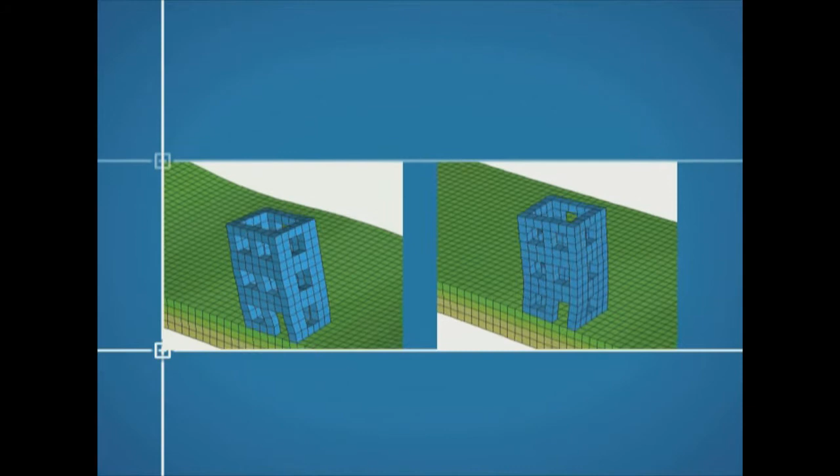Seismic waves are the energy waves caused by the sudden breaking of rock within the Earth. They convey the energy that travels through the Earth, inducing rapid cyclic movements at the base of the buildings hit by the earthquake, meaning that strong inertial forces appear.

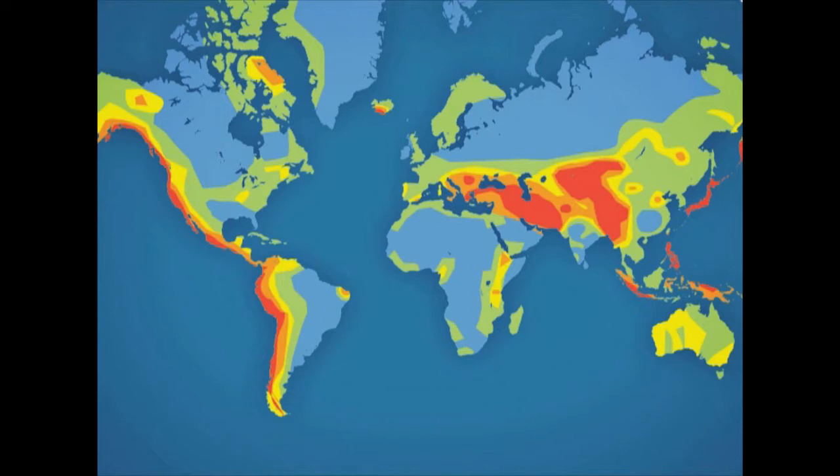Seismic hazard is the study of predicted earthquake ground motions at any point on the Earth. There are places in the world where the seismic hazard is higher due to their proximity to the lines of intersection between different plates. Seismic risk analysis takes the results of seismic hazard and evaluates the impact of the earthquake on buildings.

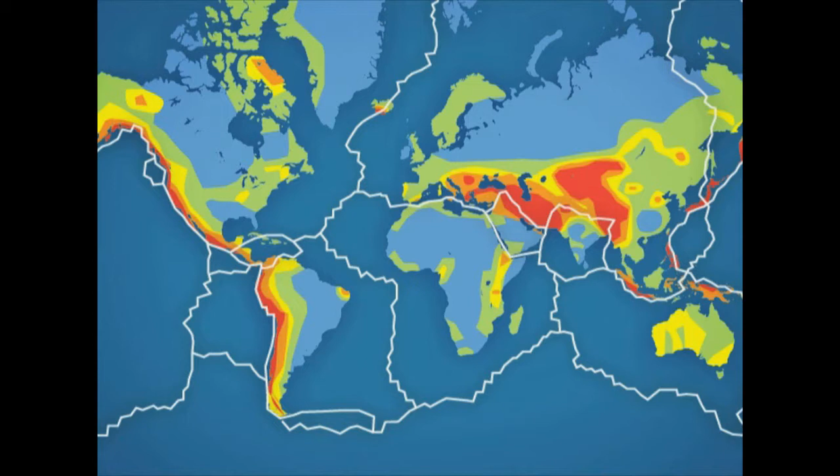Assessing the seismic risk is a key issue in the conservation of cultural heritage buildings in earthquake-prone areas. The complex structure of historical buildings makes it difficult to predict their behaviour during earthquakes. There are many examples of severely damaged or even collapsed monuments of inestimable architectural and cultural value. The 1997 collapse of the vault of the St. Francis Basilica in Assisi, Italy.

The tragedy of the 2001 Bhuj earthquake in Gujarat, India, taking its toll on the rich architectural heritage and culture of the region. The destruction of entire cities, such as Lisbon, Portugal, 250 years ago, and Reggio Calabria and Messina, Italy, 1 century ago.

In the framework of the EU-India ECCP project, Improving the Seismic Resistance of Cultural Heritage Buildings, aimed at the preservation of ancient masonry structures, with regard to the seismic risk, different investigation and analysis procedures were applied to 4 emblematic historical structures located in Portugal, in Italy, in Spain, and in India.

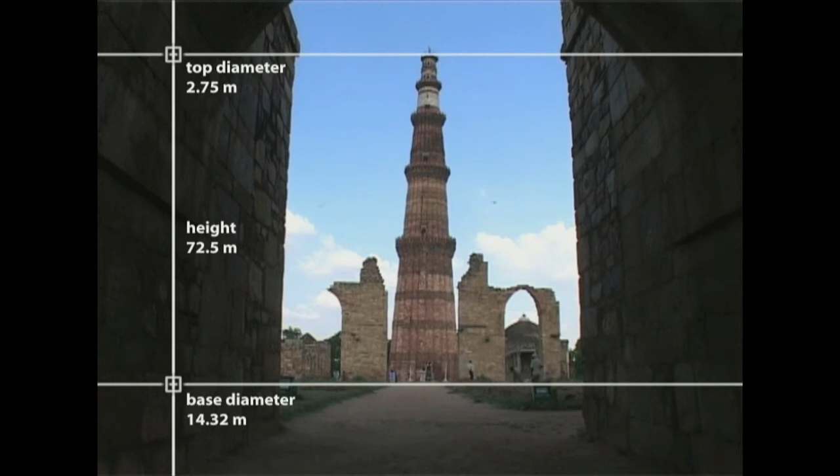The Qutub Minar is the highest stone tower in India and one of the tallest stone masonry towers in the world. Its construction began during the reign of Qutb-ud-din Aibak around 1202 and was completed by his successor. The Qutub Minar, rising to a height of 72.5 metres, is composed of an external circular polylobed shell and a cylindrical central core.

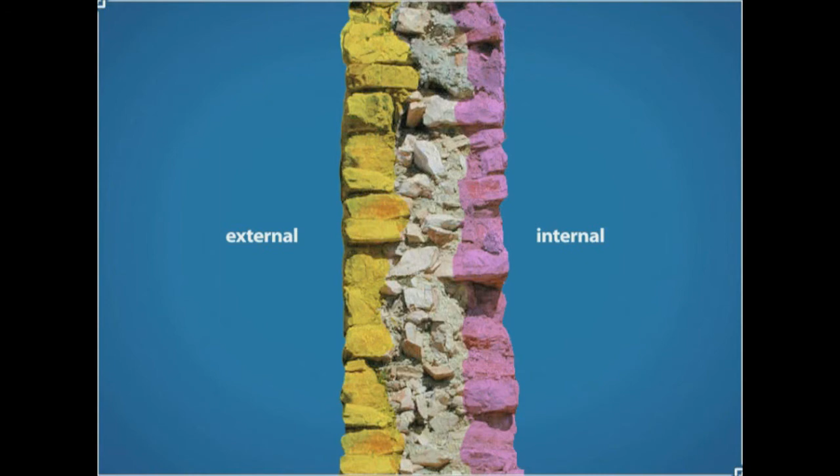The core and the external shell are connected by a helical stairway with 379 steps made of Delhi quartzite stone. The Minar outer shell is composed of a 3-leaf masonry wall. In the first 3 stories, the external veneer is made of ashlars of red and buff-coloured sandstone, while the inside is composed of Delhi quartzite ashlars. In the 2 upper stories, the external veneer is made of white marble stones and the internal of red sandstone. The infill is made up of stone masonry rubble.

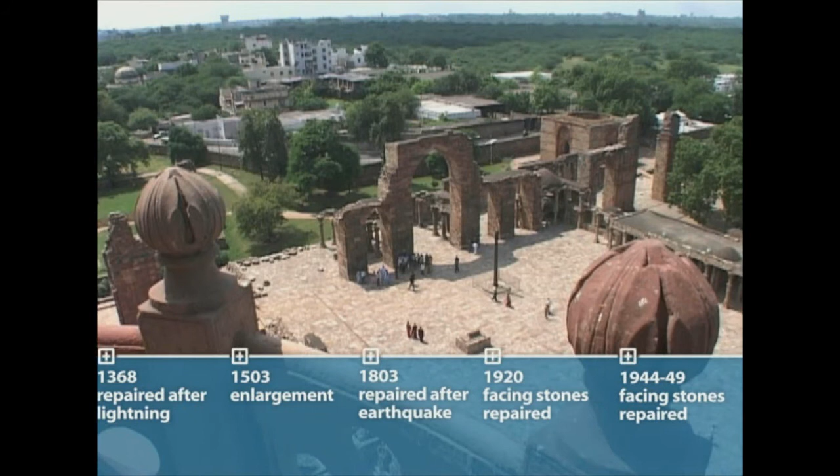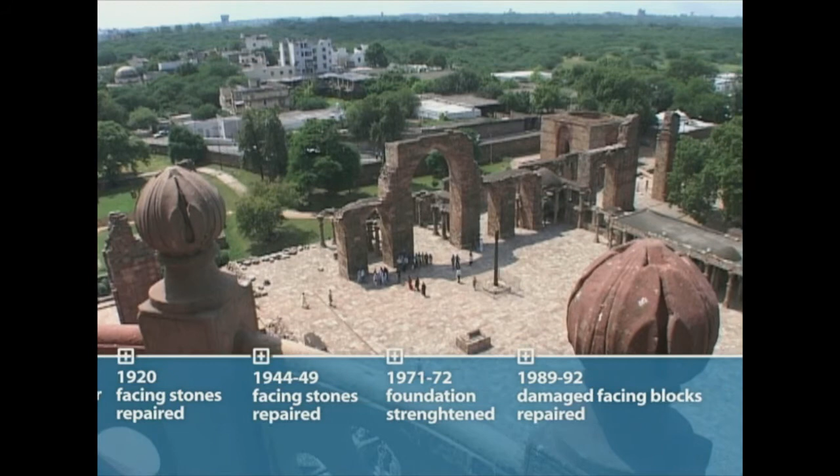Managed by the Archaeological Survey of India, the Qutub Minar has constantly been the object of restoration and maintenance work since it was built. As with all monuments in the care of the Archaeological Survey of India, there is a regular annual monitoring and maintenance plan, combined with a running programme of special restoration projects. The Qutub Minar Tower and Complex were registered in the UNESCO World Heritage Monument List in 1993, as an outstanding example of the architectural and artistic achievements of early Islamic India.

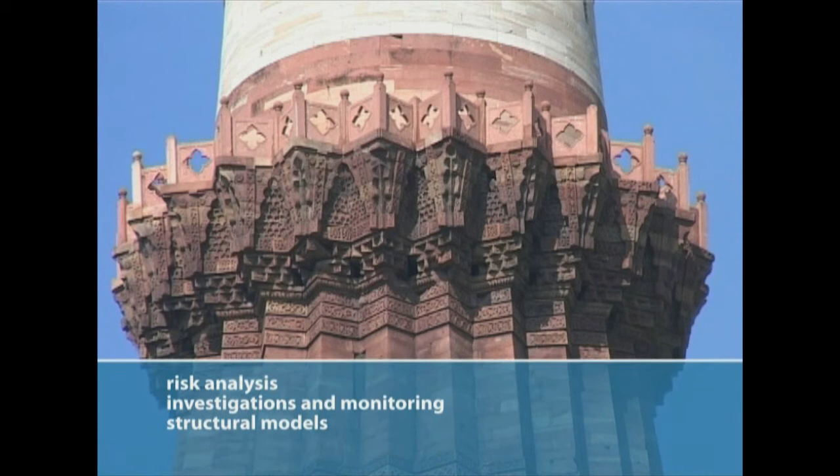The research programme includes a plan of action based on a multidisciplinary approach, entailing aspects of risk analysis, modern techniques for surveying and monitoring applied to monuments, and advanced computer simulation of reality in a virtual environment. The objective is to provide recommendations for the conservation of historical buildings in seismic regions, based on a thorough understanding of their structure, construction features, and materials. These recommendations, which also take modern materials and techniques into consideration, may help to prevent earthquake-induced damage to buildings.

The first step of the analysis for the preservation of monuments consists in the execution of a sound investigation campaign to obtain detailed knowledge of the structure and materials. With this perspective, after gathering information on the history and the present-day damage, several non-destructive tests were carried out on the Qutub Minar, intended to define the dynamic behaviour of the tower and to characterise the masonry conditions. Non-destructive investigations consisted of dynamic identification and sonic tests.

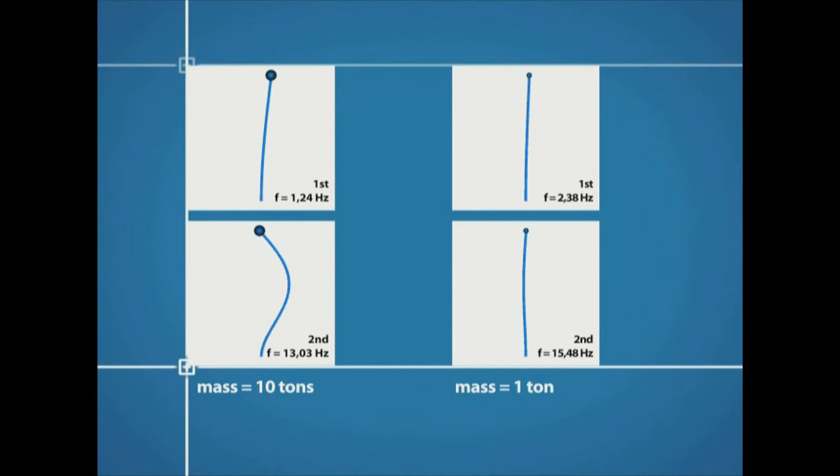Every structure possesses particular ways of vibrating, whatever the source of excitation, such as wind, traffic or seismic events, that essentially depend on its geometry, mass, stiffness and restraints. The vibration characteristics of a specific structure are a precious source of information about the physical and mechanical characteristics of the structure. Ambient vibration tests were thus performed to define the dynamic response of the Qutub Minar.

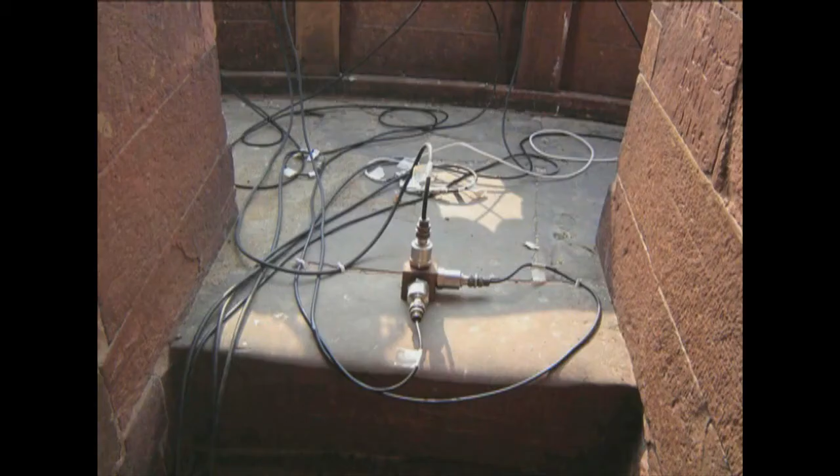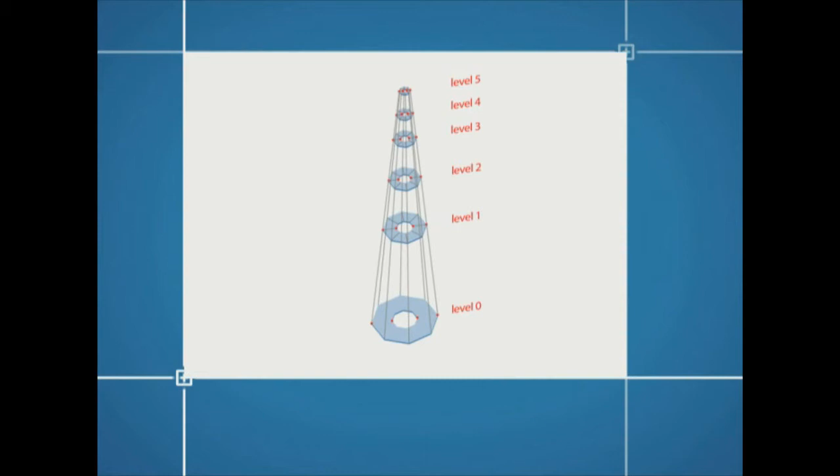Dynamic tests were carried out by using devices called accelerometers. These very sensitive transducers measure accelerations 1 million times lower than the value of gravity, defined as micro-g. They were fixed to the structure in several positions at different heights in order to evaluate the dynamic parameters of the tower and to proceed with the modal identification. As a benchmark, data acquisition systems of 3 different countries have been employed in this task.

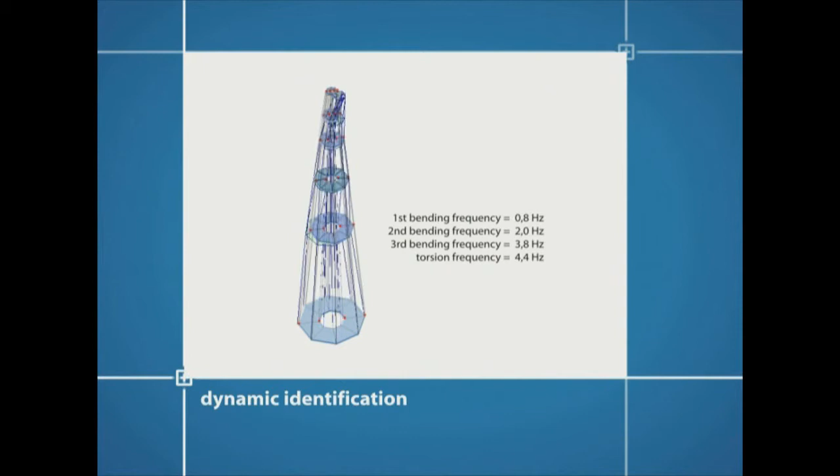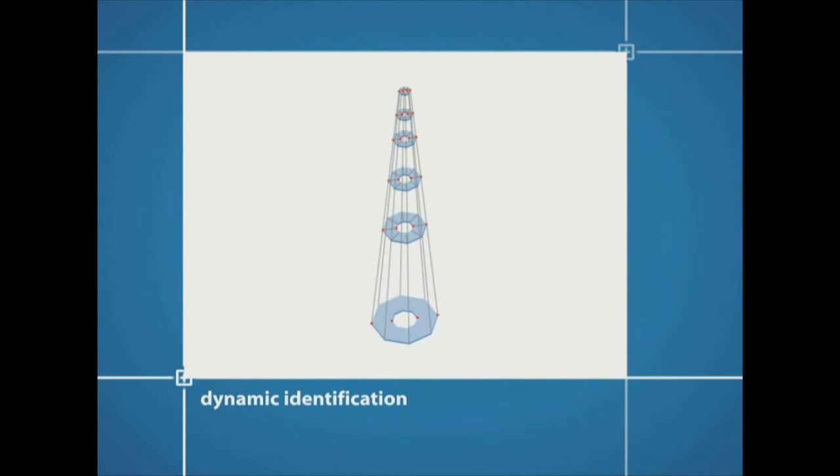Modal identification strategies allowed the definition of several natural frequencies and corresponding modes. The comparison with the results obtained by the acquisition systems of the different partners indicated an excellent match between the obtained frequencies.

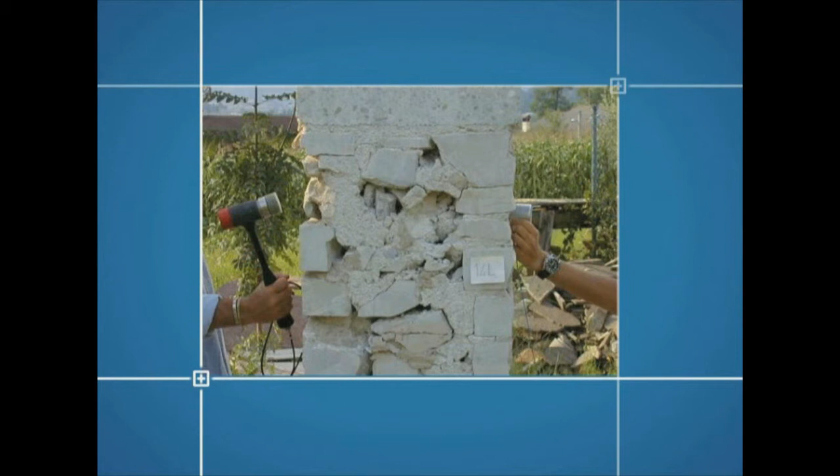Sonic tests are applied for measuring the transit time of elastic waves in masonry structures. This transit time and the calculated sonic velocity provide information about the quality and consistency of the masonry element under investigation. The velocity is influenced by the composition of the masonry, as well as by the presence of inhomogeneities, voids, and deteriorated areas. Results from sonic tests carried out on a corner at the base of the tower qualitatively defined a masonry with fair compaction characteristics.

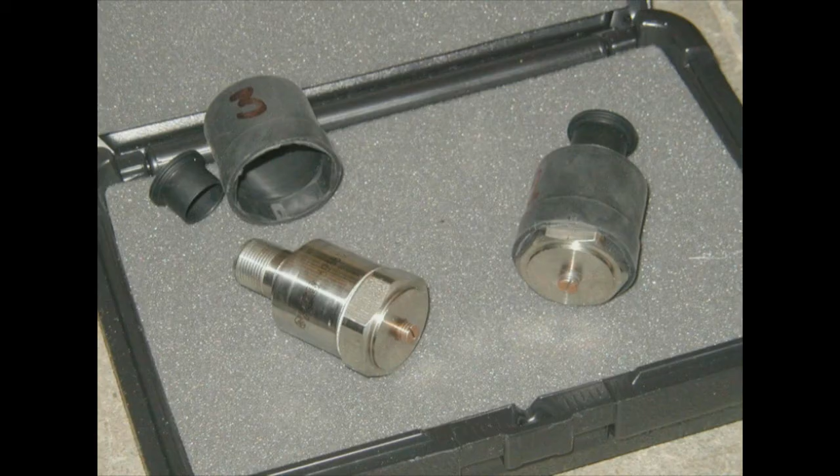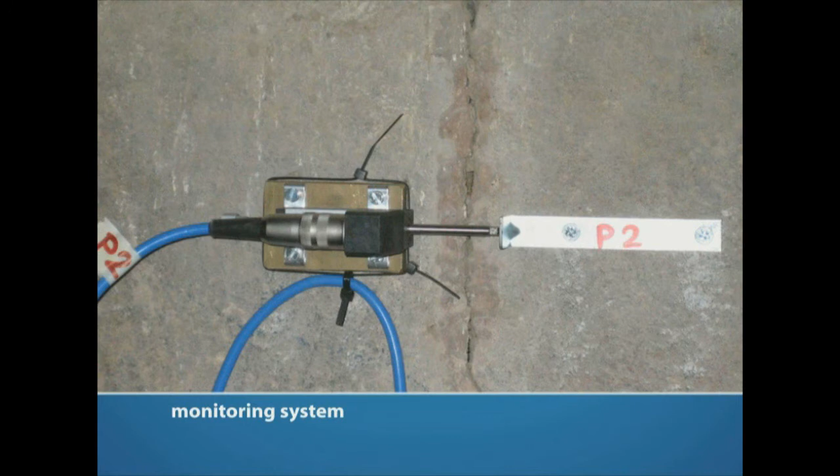Finally, a monitoring system designed specifically for the tower was installed, with the aim of characterising the response of the structure to the seismic activity. The system starts to record the data when the signal exceeds a predefined threshold based on local vibration conditions.

To properly evaluate the safety of an existing building, it is necessary to adopt suitable modelling strategies and to take into account the characteristics of the selected materials. In fact, masonry presents rather complex mechanical properties. A simple description of the material is not possible, since it does not respect common hypotheses, such as an isotropic, homogeneous and linear elastic behaviour. For this reason, suitable representation of materials must include cracking and crushing of masonry when subjected to the different loads.

Different structural models of the Qutub Minar were prepared to assess its seismic safety, using a tool that engineers denote as finite elements analysis. The models are representative of the way forces flow in the structure when subjected to different loads, for example, self-weight and seismic actions. Once calibrated, they can be used to estimate the safety of the structure.

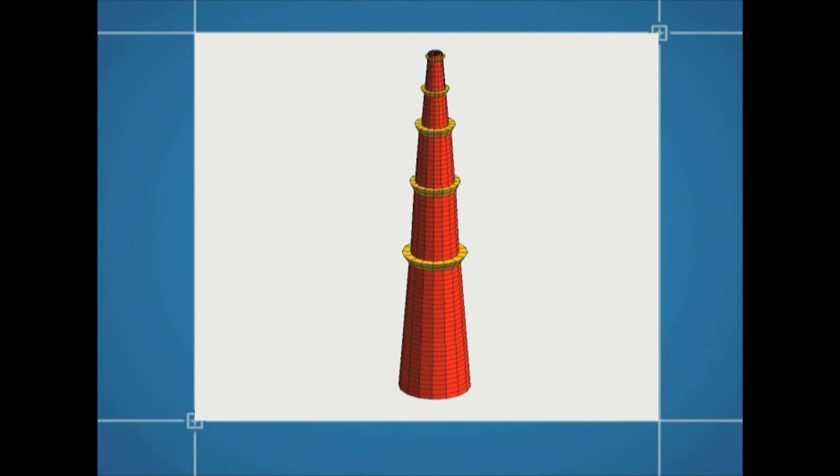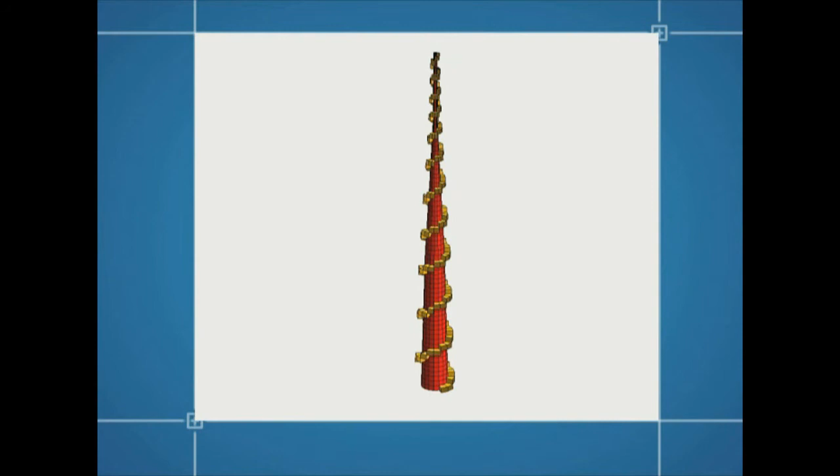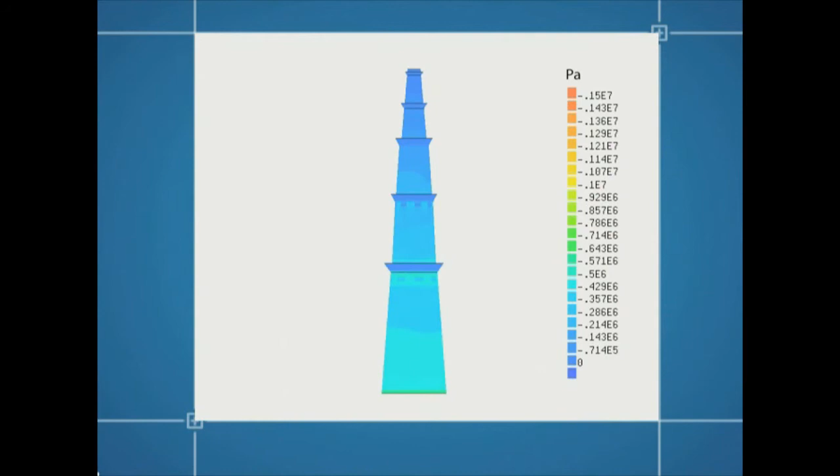The models considered to simulate the structural behaviour of the Qutub Minar take into account the different materials of the structure: the external 3-layered wall with the internal rubble masonry, the stairway, the inner core. Also, doors and openings can be taken into account. The actual weight of the structure was applied to the virtual model. This provided an indication of the present flow of forces inside the tower.

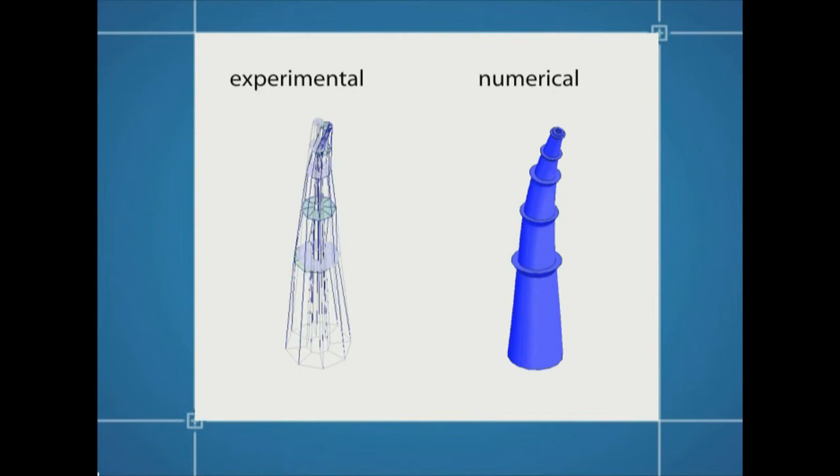Natural frequency analysis was carried out to validate the model using the data obtained in the experiments. A good comparison was obtained, since the experimental mode shapes are very similar to the ones defined by the numerical models. To evaluate the dynamic behaviour of the Qutub Minar, and therefore assess its safety with respect to earthquakes, dynamic and equivalent static analyses, assuming cracking and crushing of masonry, were selected. These are sophisticated analysis tools not yet widely available in engineering practice.

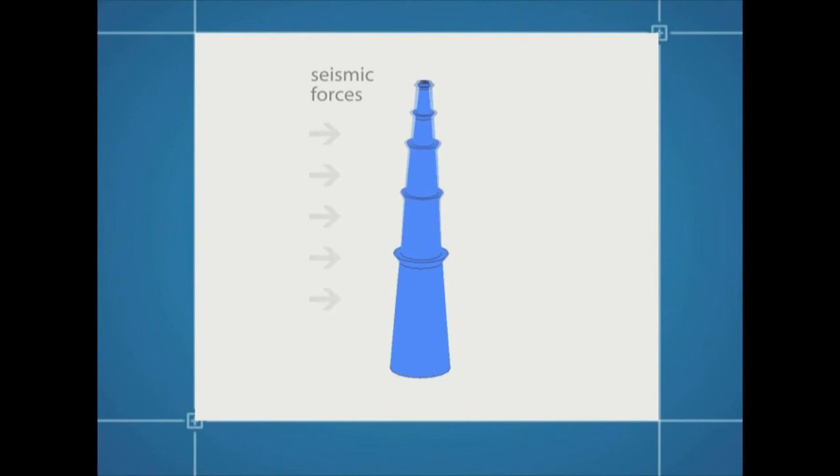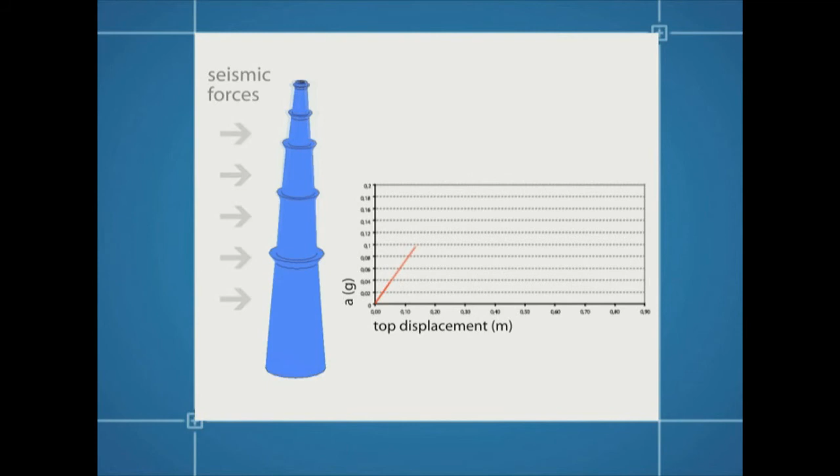With the pushover analysis, a set of horizontal forces, or accelerations, is applied to the structural model to simulate the seismic action. It is then possible to draw a capacity curve representing the displacement of a control point of the structure versus the load set applied.

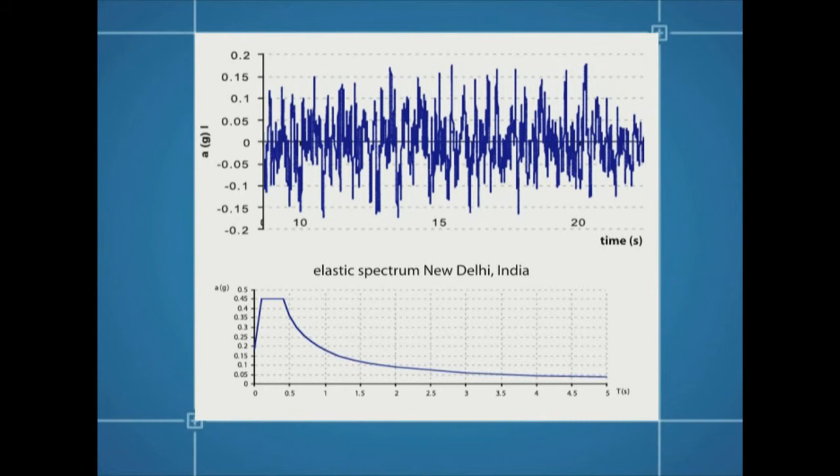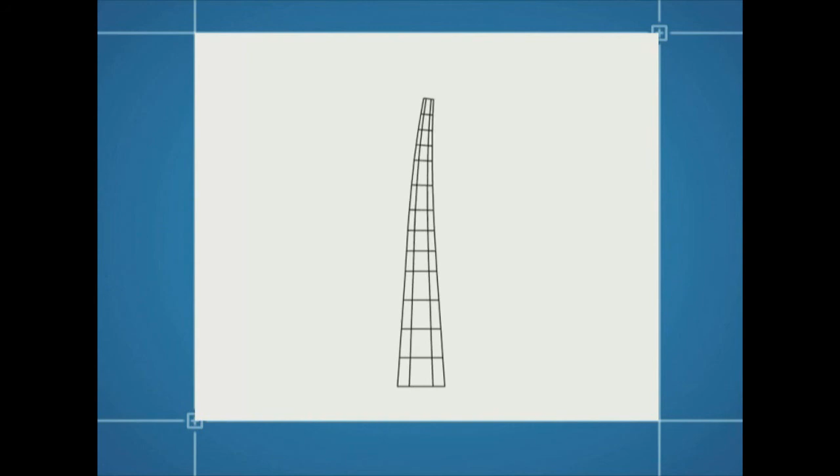The dynamic analysis proved to be more representative with respect to the seismic behaviour of the Qutub Minar, since it can detect a number of peculiar vibrational characteristics of the tower that cannot be appreciated by applying a conventional pushover analysis. The earthquake load simulations indicated that the structure generally manifests moderate displacements up to the third balcony, and a localized large amplification, in terms of accelerations and displacements, is detected in the upper part of the tower.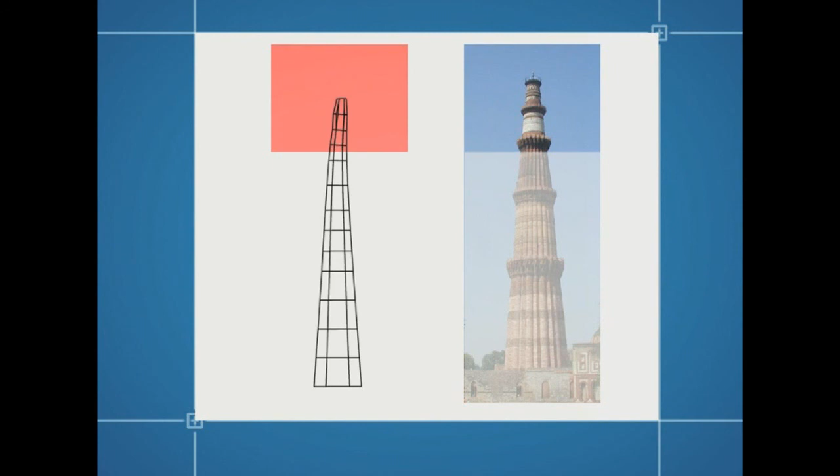The research work carried out within the project represents a valuable effort to understand the structural behaviour of masterpieces of European and Indian architecture and culture. The knowledge of the structures proved to be crucial in the definition of advanced structural models used for the assessment of the selected buildings. It is therefore essential to acquire an in-depth understanding of cultural heritage buildings. As these buildings represent the genius of our predecessors and the identity of our cultures, we should strive to keep them in perfect condition for the generations to come.